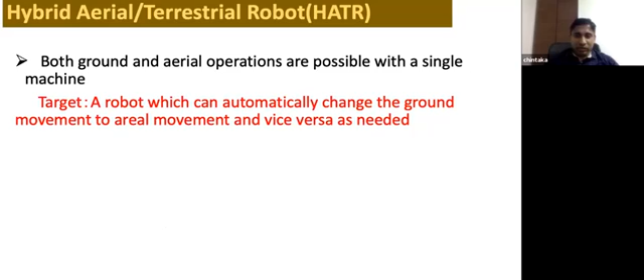So this is a robot which can automatically change from ground movement to aerial movement and vice versa. This is the main concept of this hybrid aerial and terrestrial robot. With this hybrid aerial and terrestrial robot, we can achieve something we cannot achieve with the robot itself as a terrestrial robot, or with the robot as an aerial robot.

For example, when we are going to use a wheel robot for some operation, in the case that we want to send it to a place a little far from where the robot is, with an aerial robot we can send it by flight easily, but with the wheel robot, maybe we have to take it by another vehicle or another robot, or in another way.

However, if we can add the flight function to the wheel robot, we can send it to a far place a little bit more easily than without having flying functions. So that is what we are going to do in this project.

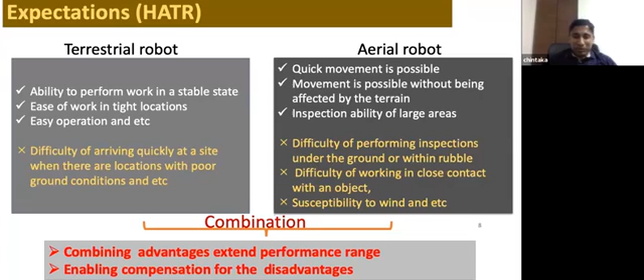In this slide, in the top area, we mention the strong points of each terrestrial robot and aerial robot, and the bottom area shows some weak points of each robot. At the end, if we could combine these two types of robot, we can extend their operational abilities further, as well as reduce some disadvantages. So this is the purpose of making this robot.

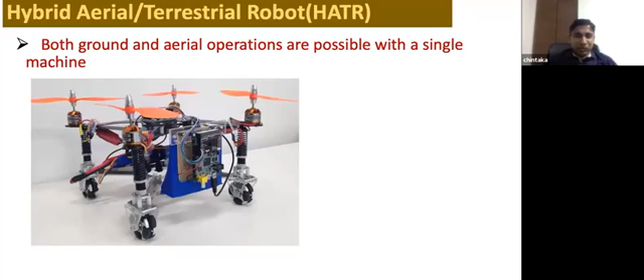So its concept is like that: terrestrial robot and aerial robot, we combine together, and we have a hybrid aerial terrestrial robot. This is the kind of machine we made in my laboratory. You can see that it includes wheels as well, and of course it includes the drone functions. Drone means the UAV functions for having flights.

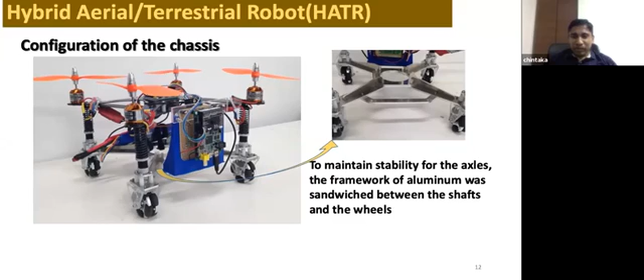Additionally, sometimes when making this kind of robot, if it has a flight and then it's going to be landed, when it touches the ground there's a huge shock. Depending on the control method, we can reduce the shock, but still there's some shock. Due to this shock, the robot can be broken down easily. So we solved this problem by using dampers and springs, so shocks to the chassis while landing are suppressed.

Actually this technique was made through a lot of trial and error. However, now the robot in my laboratory is very strong, so we use it for research projects. So I would like to show you a video of this.

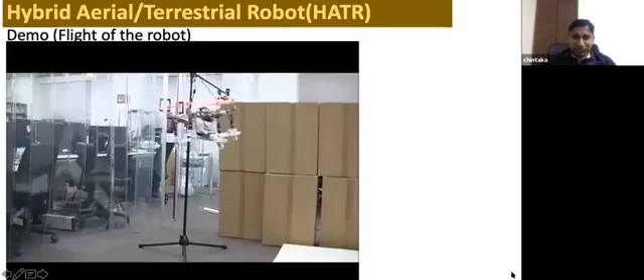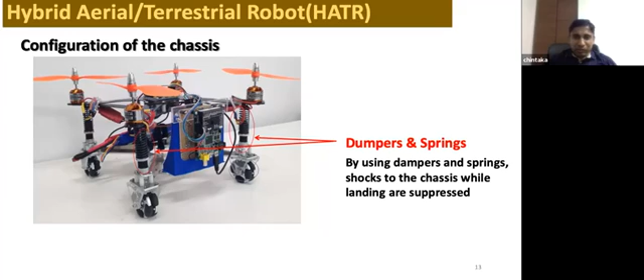This is a video of the robot having a flight. As you can see, in this robot we can add motors for the wheels, but here is the situation where we have not had them. So one of our students wants to have ground movement by the flight mechanism. This is a project done in the laboratory.

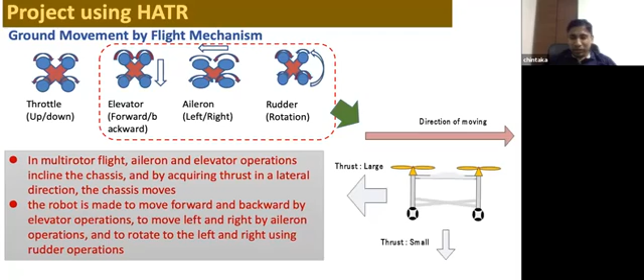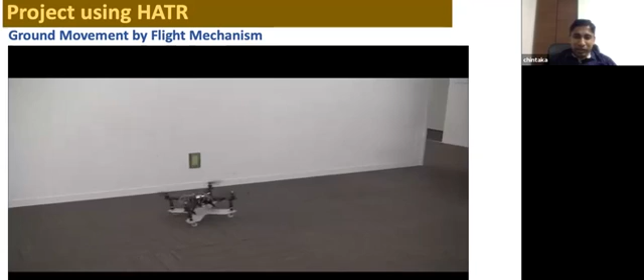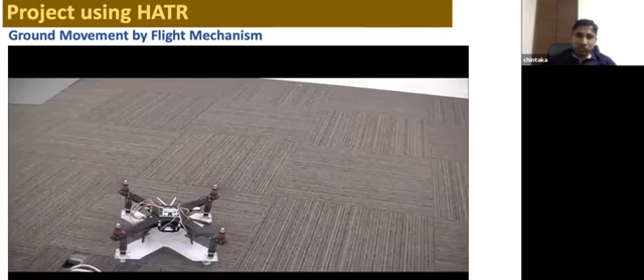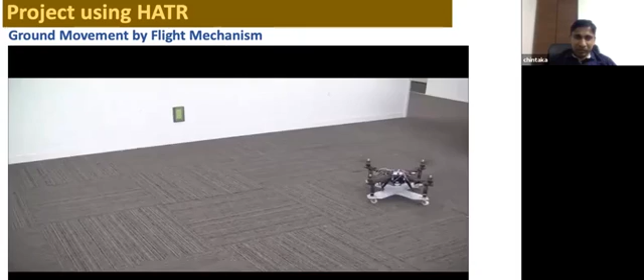So let me show you a small video, but still the results are not successful. It is moving on the ground, but still the results are not successful. It needs more research to improve it. Okay, so I think this kind of research still has some work going on in the laboratory.

Another project related to this robot is very much related to today's topic: obstacle avoidance by flight. Here, obstacle detection is done by a vision-based method. In the future, we are going to have this robot.

We are targeting to have some operations in disaster fields or something like that, where sometimes it can conduct operation while moving on the ground, and sometimes it can have operation while flying in the air, avoiding obstacles by flight. So here are some works related to the avoidance of obstacles by flight.

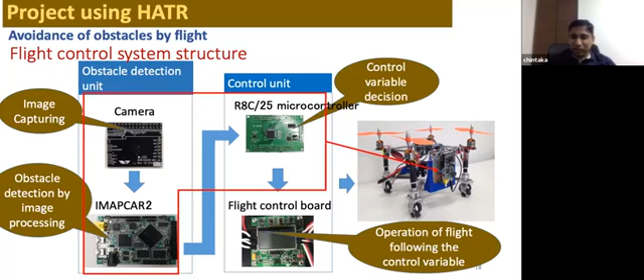And on the right side, almost in the middle of the slide, you can see that we have another microcontroller to decide the flight control variables, and this information is sent to the flight control of the robot. About this kind of system, I'm going to talk to you in the next project I'm going to present today. So all this hardware is installed in the machine, like that.

So when we install this kind of hardware, what is the most important point? Let me show you some important points. The hardware should be lightweight and small in size. And when we install them, the balance of the robot is extremely important. The gravity point of the robot should be kept roughly on the midpoint of the robot. Otherwise, if the robot does not have balance with the other hardware, we cannot have a very smooth flight. The flight becomes a little unstable.

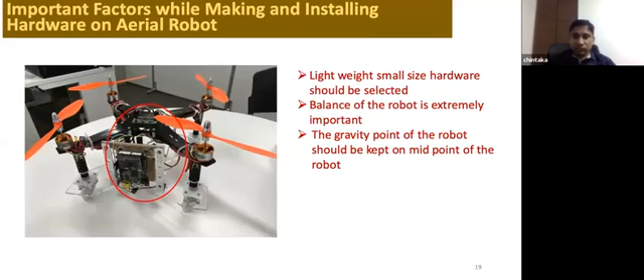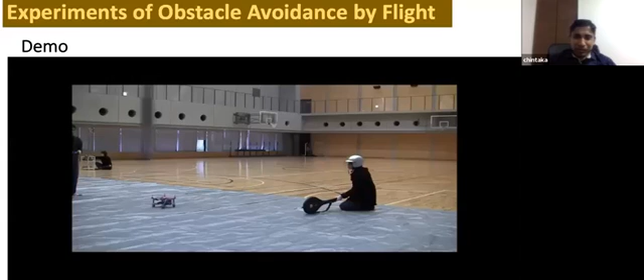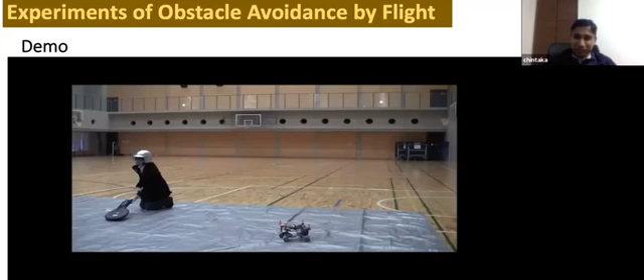Let me show you the experiment we did, obstacle avoidance by flight. It's like this. It's completely automated. The ground movement is also done autonomously with the method I showed you just before, and you can see that it can avoid obstacles by flight, from another direction too. This experiment was done in an indoor environment in Tokyo. We are not allowed to fly outside, so sometimes we do experiments in an indoor environment.

So now I'm going to talk about another project we did in our laboratory: vision-based autonomous hovering and landing control. Under this title, I'm going to talk about a lot of things regarding the topic today. First of all, I'm going to show you the problem setting, what is the problem we are going to solve.

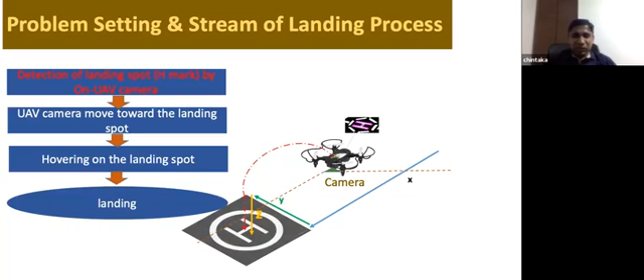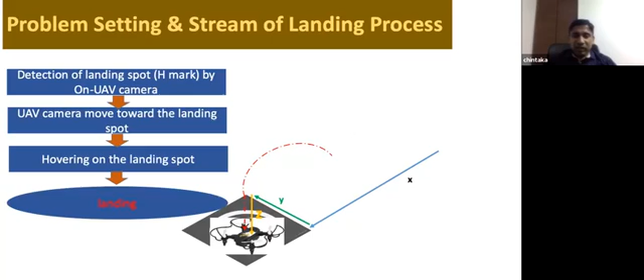Here there's a UAV. If the UAV finds the landing spot H mark, the UAV automatically moves towards the landing spot, then conducts some hovering before landing, and then finally lands. This is the problem in this project. Okay, so to carry on this project, what works do we have to do? This is very important. You can see the work to be done in this slide.

We have to make a technique to convert the manual mode to the autonomous mode, and vice versa. Then we have to consider the detection of the landing spot from the UAV camera images. And while doing so, we have to control the robot to move towards the landing spot, as well as hover there.

To do so, we have to convert image information to real world measurement, for example, image pixel measurement to real world measurement. After that, the autonomous control of the UAV can be achieved following these measurements. In the autonomous control, moving towards the landing spot, hovering on the landing spot, and landing is conducted.

If you have experience with UAVs, you may know generally how a UAV works. Generally we have a remote control transmitter; there are different types. We can send commands to the drone through this transmitter. It sends signals to the receiver.

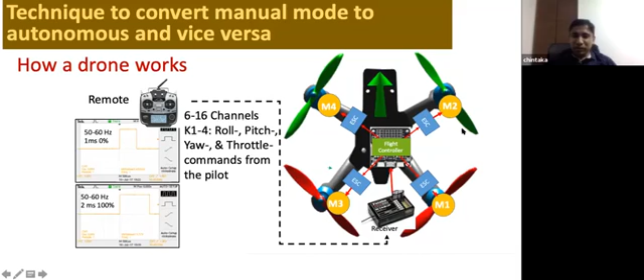So in this work, to return to the original story, first I'm going to talk about the techniques to convert manual mode to autonomous mode. Actually, when we are going to do some work with this UAV, we have to keep the manual mode. It should be under the control of a human being. We cannot give it complete autonomous mode; then it's going to be very dangerous. If there's some mistake, it's going to be an accident or something like that.

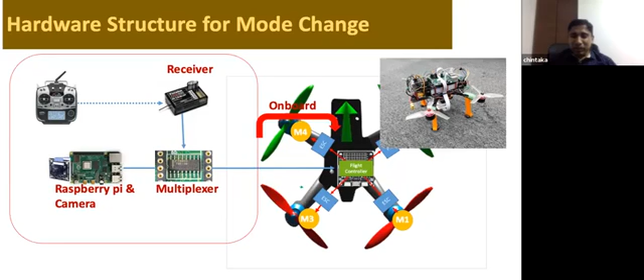So this is a real machine we made for this experiment. Let me introduce shortly how we do it. Generally the drone is under the manual mode, so the command from here goes to the flight controller. But if the system detects the landing spot, then it converts to the autonomous mode. Of course, we can forcibly return it to the manual mode as well if we want.

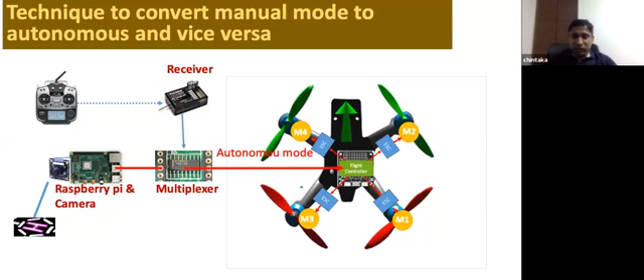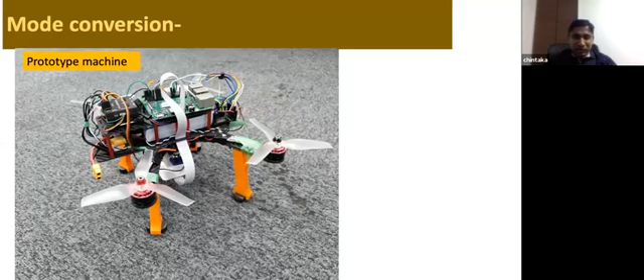We have kept this under the human being who does the piloting. Okay. So there's a story behind how to convert manual mode to the autonomous mode. There are some details here, but I'm going to skip them. This is the machine in a bigger picture. Maybe you can see the mode control in a video.

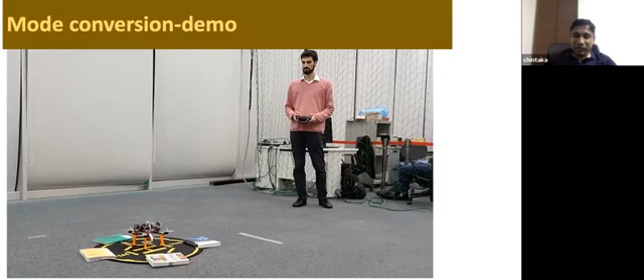You can see now when it detects the mark, it's already detected. Now it is under the autonomous mode, but here the guy already changed it into the manual mode again and made it land. But later on that is automatic. I will explain how it lands autonomously. Okay.

So to land, I'm going to talk about the detection of the landing spot from UAV camera images. As I mentioned just before, the image processing is done by Raspberry Pi, and here we use a wide angle camera. If you're interested in doing a project with a vision-based camera on a UAV, I would really recommend using a wide angle camera. The camera we use has a 160 degree field of view, but generally this is like 80, or maybe half of this. If you use a wide angle camera, you can easily do this kind of work because it can capture information over a wide area.

Here the camera is installed on the robot with a gimbal. Because we have to keep the camera horizontal when the UAV flies, we use a gimbal for that.

So I'm going to talk a little bit about the landing spot detection algorithm. At the first stage we use some very simple image processing. We take the image from the camera, convert it to grayscale, and then binarize the grayscale image. After that we try to extract some corner points from the images, the corner points of the H mark. There should be 12 corner points which have some relationship. We use the relationship, which I'm going to talk about now.

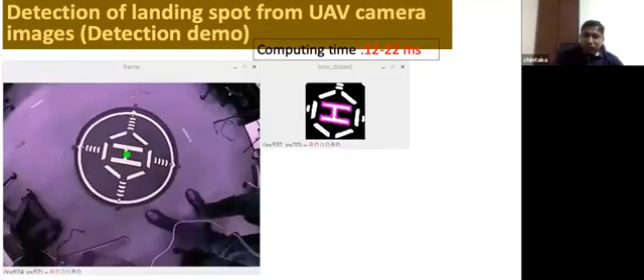Later, I will show you that through this algorithm we could control the robot and achieve autonomous flight. Here the computational time was 12 to 22 milliseconds.

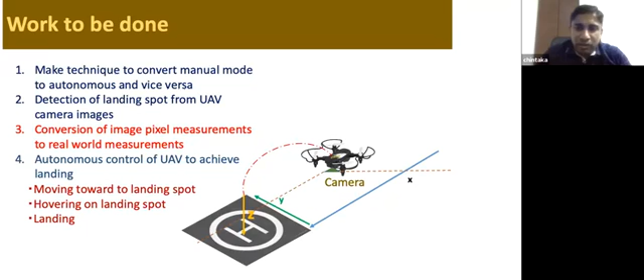Another target we had in this project was to convert the image pixel measurement to the real world measurement. I'm going to explain a little bit about it, not in very much detail, but certain details.

So I think to achieve at the end, after this conversion, our final target is to achieve horizontal control of the flight and some landing. But to achieve horizontal control, we need a centimeter value to function the system. So converting the pixel distance to the real distance is very important.

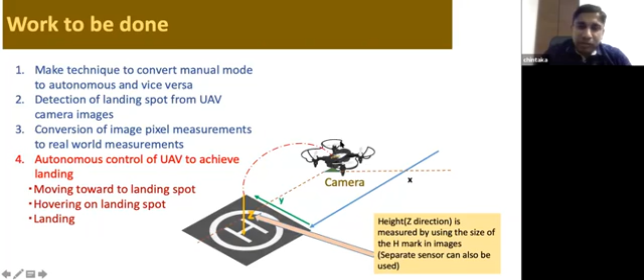So to achieve finally the autonomous control of the UAV, our final target is to achieve autonomous control of the UAV. Here, the height is measured by using the size of the H mark in images, or we can use some pixel information of the H mark to measure the height, or we can use a separate ultrasonic wave sensor or other sensor to measure the height of the UAV. So whatever method we can apply for this.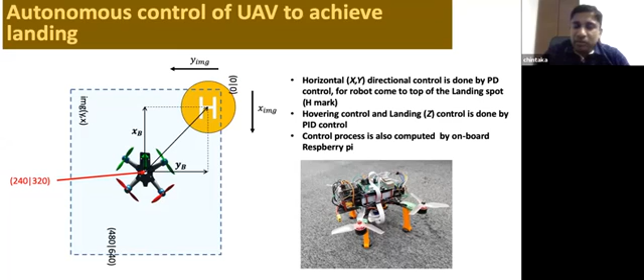So finally, I'm going to give you a little information about how we achieve the control. Here, XY directional control is done by PD control for the robot to come to the top of the landing spot, that means the mark, and then hovering control and landing control is done by PID control. Finally, the control process is also computed by the onboard Raspberry Pi computer. All the processing in this system is done by the Raspberry Pi computer.

So I'm going to show you some experimental video of hovering, and here this is going to be the hovering method.

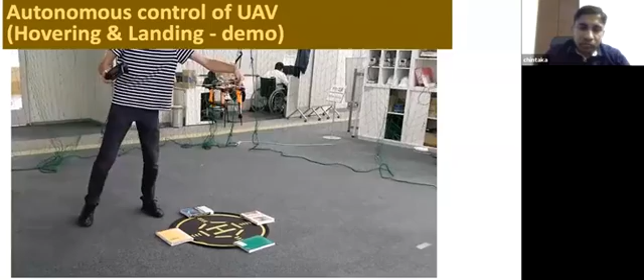Here, actually, the hovering is—you can just focus on the hovering. In this next video, I'm going to show you that.

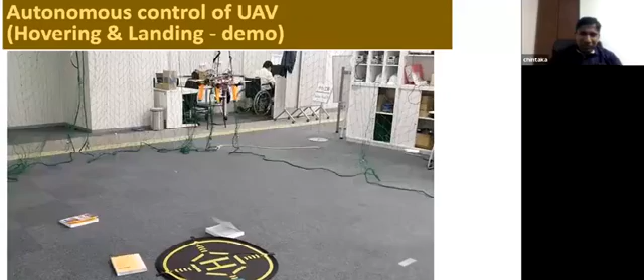I hope you could see that it could have some hovering on the landing spot. Even when we change the landing spot, the UAV moved autonomously along the chain and finally it could land almost. But as you could see, at the last moment the flight was not under control, because it was within the last 10 centimeters.

When it comes to the last 10 centimeters, when the altitude gets to 10 centimeters, it loses all the mark detection. So that final moment is not so good. We are going to improve this in the future.

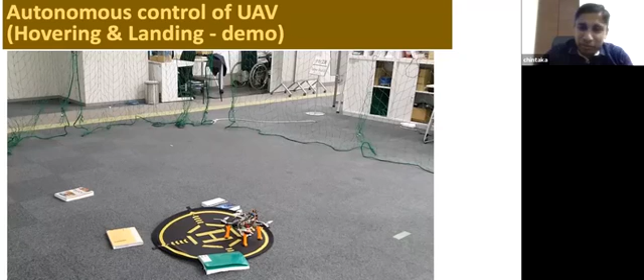I think I already talked about the main stories of the presentation today. As the final story, it's also related to research, but I'm going to introduce you to some research projects done in my laboratory. I'm not going to show you very much detail, but very shortly I just want to show the project to you, that's all.

The project name is Audio Video Processing Based Victim Detection at Disaster Site by UAV. In Japan and many other countries, some researchers are trying to use UAV to detect victims in the disaster field. Victims are detected by the UAV, and this information is sent to the rescue team, to reduce the workload of the rescue teams. Generally, people use UAV cameras to achieve this.

But when the camera cannot capture the victim—meaning the victim is not visible, is covered by some object or something—the victim will not be captured, will not appear in the camera images. So one of our students wanted to give some solution for this kind of situation.

He was looking for possibilities of using voice. His idea is very simple: the UAV includes a microphone, and we installed a microphone and speaker on the UAV. The speaker emits sound from the UAV to send some sound to victims so they can respond.

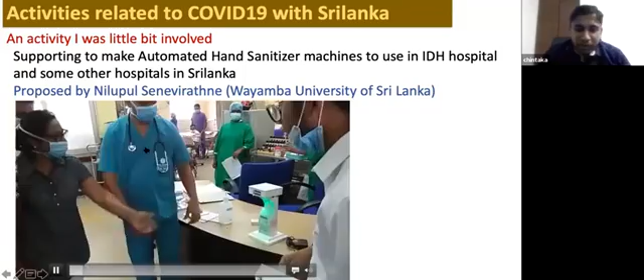Maybe you can see the machine here, what kind of machine it is. He said the machine can fix all the sanitizer bottles in Sri Lanka very easily, and you don't need to touch the bottle at all. So that means it can be used in that way. I think this machine is very much helpful in hospitals like IDH hospital in Sri Lanka.

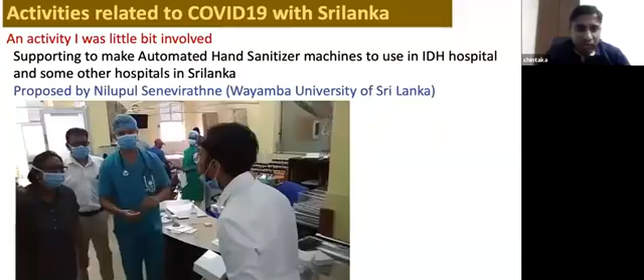So again, I think supporting and encouraging this young generation is very important, to help bring their product to the business level. So this is the end of my presentation. Thank you very much. And I got a question in the chat to share the papers.

Okay, I'm going to share the papers here, the sites of the papers, for educational research purposes. I guess the thermal imaging is restricted. I got a comment that thermal imaging is restricted for use in UAV for educational research purposes. Actually, in this presentation, we don't use any thermal imaging, we only use general images.

Then I got a question: could you please share the link related to the mentioned papers? Okay, so I will share it now. Give me 1 minute, 2 minutes.

In the meantime, can I ask a question, Professor? I'm Danushka, joining from Estonia, but I'm Sri Lankan. Okay, great. Yeah, it's very interesting to see your presentation.